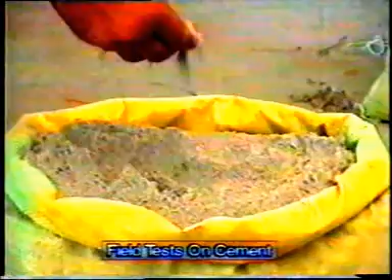Open the bag and take a good look at the cement. There should not be any visible lumps. The color of cement should normally be greenish grey. Thrust the hand into the cement bag. It must give you a cool feeling. Take a pinch of cement and feel between the fingers. It should give a smooth and not a gritty feeling. Take a handful of cement and throw it on a bucket full of water. The particles should float for some time before they sink.

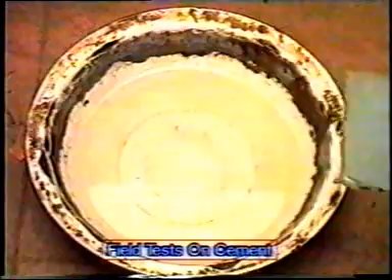Make a stiff paste of cement and make a cake with sharp edges. Put it on a glass plate and slowly take it under water. See that the shape of the cake is not disturbed while taking it down. After 24 hours, the cake should attain some strength without change in its shape.

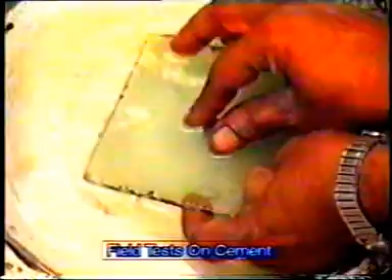Now let us see the fineness of cement test. Fineness of cement has an important bearing on the rate of hydration and hence on the rate of gain of strength. Finer particles offer greater surface area for hydration and hence the faster and the greater the development of strength. A good cement should have an average particle size of 10 microns and the maximum number of particles should have less

than 100 microns. The size fraction below 3 microns will have dominant effect on the one-day strength. The fraction between 3 to 25 microns will have effect on 28-day strength. This fineness test is conducted to know the fraction retained on the 90 micron sieve, whose presence is limited to 10% based on the strength criteria.

Disadvantages of more fineness of cement: Number 1, susceptibility to air setting. Number 2, early deterioration. Number 3, more drying shrinkage of concrete. Testing methods: by sieving and by air permeability.

Let us now see how this test will be conducted. Take 100 grams of cement into a 90 micron IS sieve. Break down air-set lumps, if present, with the fingers. Sieve the sample for about 15 minutes. Weigh the residue left in the 90 micron sieve.

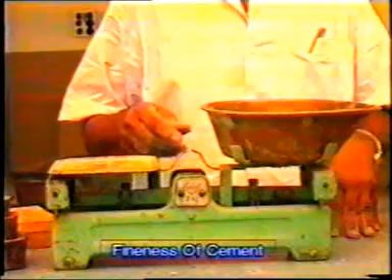Now the weight of the residue left in the 90 micron sieve is expressed as the percentage of the original weight of the cement taken. Recommendations of fineness of cement as per IS 269/1976: the residue left in the 90 micron sieve should be less than 10% for ordinary Portland cement. This should be less than 5% for rapid hardening cement.

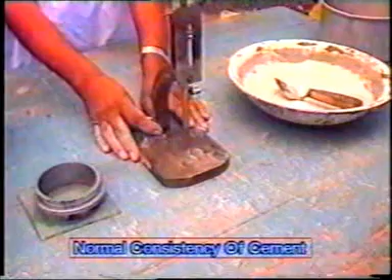The setup we are now looking at is for determination of normal consistency. Normal consistency of cement may be defined as that percentage of water which allows the plunger to penetrate to a depth of 5 to 7 mm from the bottom. This test is a prerequisite, as the quantity of water to be used for different tests is based on this normal consistency value only. Now let us see the apparatus required for this normal consistency.

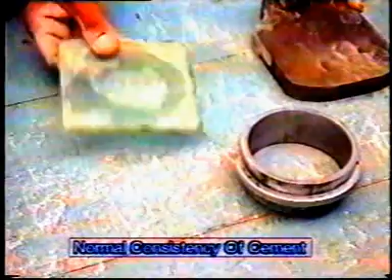Number 1, Vicat's apparatus, as per IS 5513/1968, whose penetration values are graduated from bottom to top, that is 0 to 50. Number 2, plunger of 10 mm dia and 50 mm long. Mold of 80 mm dia and 40 mm deep. Non-porous plate to place the mold and sample.

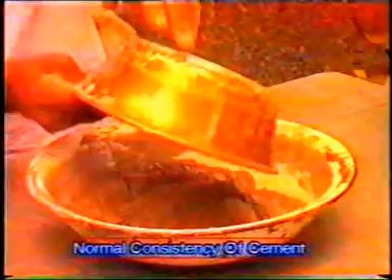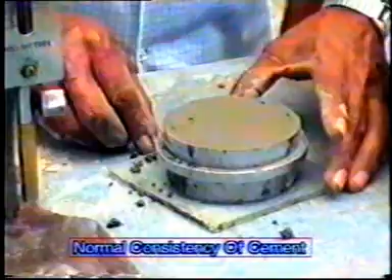Now let us see the procedure. Take 500 grams of cement. Now, as a first trial, prepare a paste by adding 25% of water by weight of cement. Fill the mold placed on a non-porous plate with the cement paste within 3 to 5 minutes from the time of addition of water to the cement. Shake the mold to expel the air.

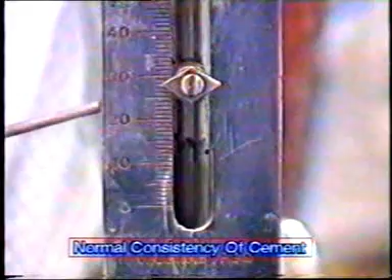Now place this Vicat's mold on the Vicat's apparatus. Now the plunger of Vicat's apparatus is brought down to touch the sample and allowed to fall quickly into the cement paste. Take the reading of depth of penetration. Now see the reading, which is more than the reading required for normal consistency, which indicates that the percentage of water added to the cement is less than required for the normal consistency.

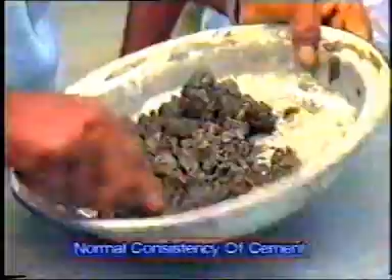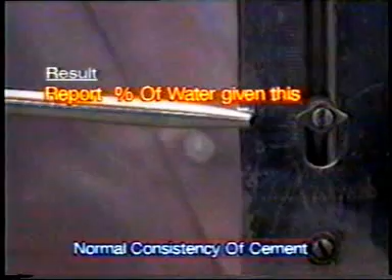Now as a second trial, let us add some more water to the cement and test it for normal consistency until the plunger of Vicat's apparatus penetrates to a depth which, measured from the bottom of the mold, reads 5 to 7 mm, as you can see in the reading now. Result: report the percentage of water required for the above process as the percentage of water required to produce the normal consistency, P.

Now, regarding initial setting time. Initial setting time may be defined as the time elapsed between the moment that the water is added to the cement to the time that the paste starts losing its plasticity. In actual practice, the starting point of losing plasticity, the end point of totally losing plasticity, and the time scale are very much important while dealing with cement paste or concrete.

Since certain time is required for mixing, transporting and placing, the concrete should remain totally in plastic condition during mixing and handling operations. Normally, a minimum period of 30 minutes is recommended for these operations to be carried out before concrete starts losing its plasticity. Initial setting time is to be found to know the time available for mixing and handling operations for a given cement, and also to schedule the above operations according to the availability of time.

Now, regarding final setting time. Final setting time may be defined as the time elapsed between the moment that the water is added to the cement to the time that the cement paste has completely lost its plasticity. No operations are to be done beyond this time. Let us go to the testing procedures now.

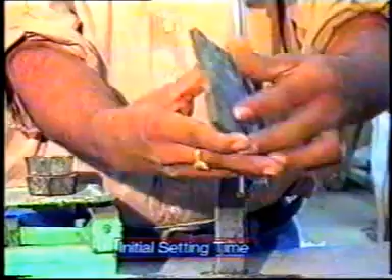Now let us see the apparatus required for the initial setting time. Number 1, Vicat's needle apparatus as per IS 5513-1969 with a needle of 1 mm square. Number 2, mold. Number 3, stopwatch. Number 4, non-porous plate. Number 5, a balance.

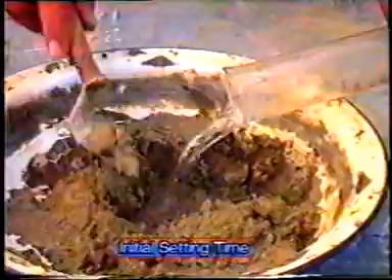Preparation of test block. Take 400 grams of cement into a porcelain dish. Add 0.85 times the quantity of water required for normal consistency. Mix the paste thoroughly and place the paste in the Vicat's mold, which is placed on a non-porous plate. Start the stopwatch at the instant when the water is added to the cement.

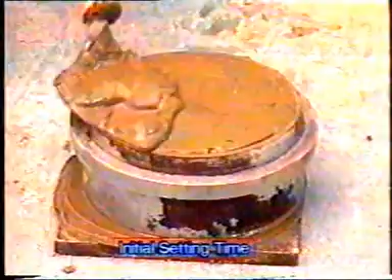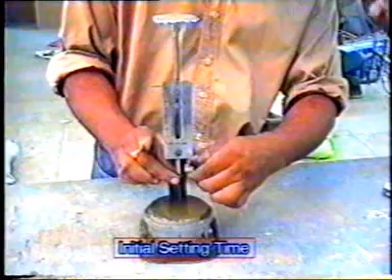Level off the surface and place the mold under the Vicat's apparatus needle. Lower the needle gently in contact with the surface of the test block. Quickly release the needle to penetrate into the test block.

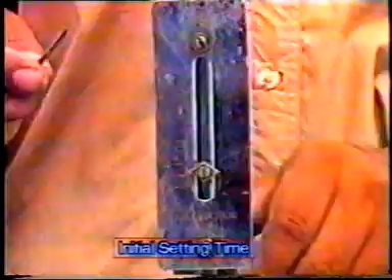As you can see, the needle has completely pierced the test block. That means that the initial setting time of cement has not yet come. Repeat the process of releasing the needle at regular intervals until the needle fails to pierce the block for 5 plus or minus 0.5 mm measured from bottom of the mold.

As you can see now in the reading, it is about 5.5 mm from the bottom of the mold, which indicates it has now reached the initial setting time period.

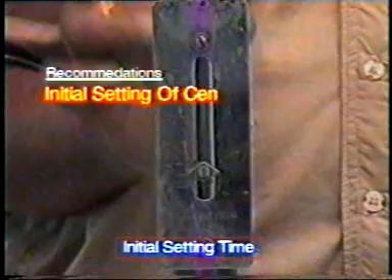Result. Report the time elapsed between the moment that the water is added to the cement to the time when the needle fails to pierce the test block, as seen above, as the initial setting time of cement. That is the time available for mixing and handling operations to be carried out in the field. Recommendations. The initial setting time of cement should not be less than 30 minutes for ordinary Portland cement.

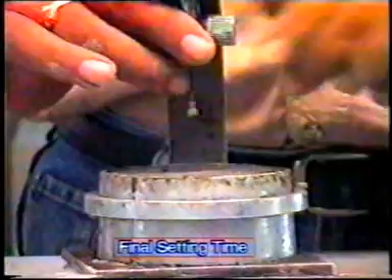Now for the final setting time, replace the needle of Vicat's apparatus with a needle with annular ring. The needle is gently applied on the surface of test block. Now you see not only the needle but also the outer ring has made an impression on the sample. This means that final setting time of cement has not yet reached.

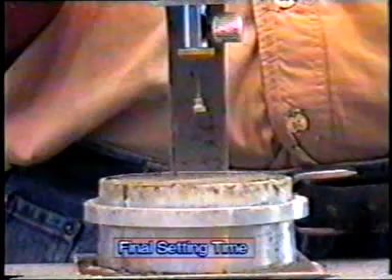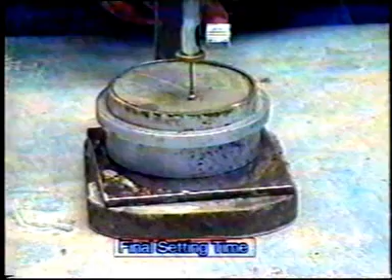This process of application of needle is repeated until the needle makes an impression on the test block but the outer ring fails to do so. Now as you can see, the inner needle of the Vicat's apparatus made an impression but the outer ring has failed. This indicates the time of final setting time of the cement.

Report this period elapsed between the time when the water is added to the cement and the time at which the needle makes impression and the outer ring fails to do so as a final setting time. Recommendations. The final setting time should not be more than 10 hours for ordinary Portland cement.

Now, soundness by Le Chatelier method. Certain cements have been found to undergo a large expansion after setting, which causes the disruption of the set and hardened mass. This will cause serious difficulty for the durability of the structures when such cements are used. This unsoundness is due to the presence of excess of lime than that could be combined with acidic oxide at the kiln. It is also due to insufficiency in fineness of grinding, too high proportion of magnesium content, etc.

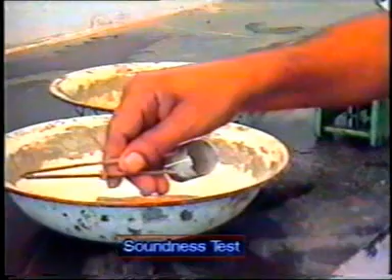Now, let us see the apparatus required for the soundness test of the cement. This method is by the Le Chatelier's apparatus. This apparatus consists of a small split cylinder of spring brass of 0.5 mm thick, 30 mm internal dia and 30 mm height. On either side of split mold, two indicators are attached with pointed ends. Length of these indicators is 165 mm.

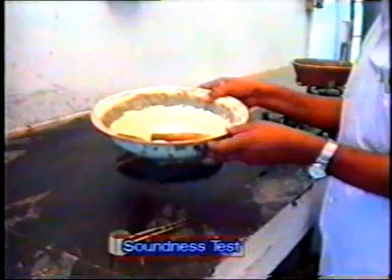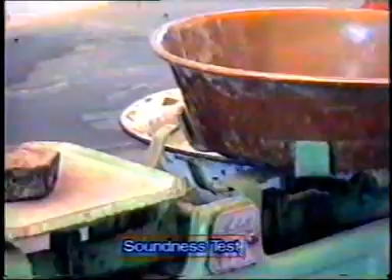Non-porous or glass plates to cover the apparatus on top and bottom. Mixing dish, small trowel, stove and dish for heating to boiling temperature. Now let us see the procedure. Take 200 grams of cement into the mixing dish. Add 0.78 times the water required for the normal consistency. Mix it thoroughly to get uniform paste.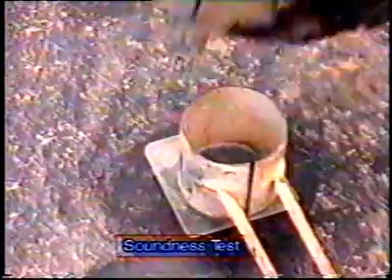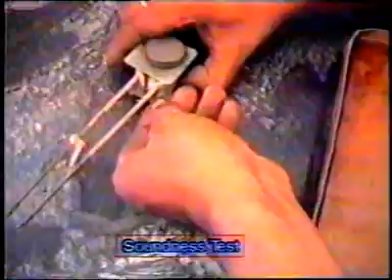Put it in the split cylinder which is placed on glass plate, taking care to keep the indicators together during this operation. Cover the cylinder with the glass plate and place a small weight on the glass plate. Put the entire setup in the water for 24 hours. Take out this cylinder and measure the distance between two indicators. Let it be L1.

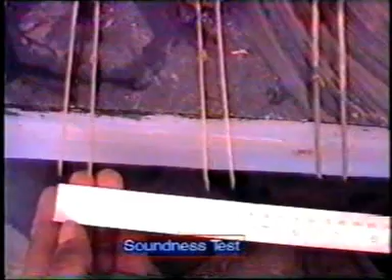Place the cylinder again in the water and raise the temperature to boiling temperature in about 35 minutes and allow it to boil for 3 hours. Take out the sample now and allow it to cool to the room temperature and measure the distance between the two indicators of the split cylinder at the pointed ends. Let this distance be L2.

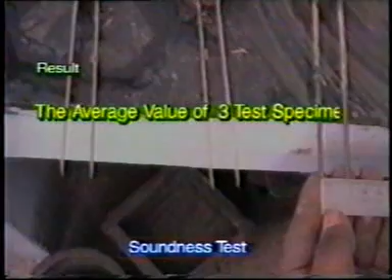The difference between the values L1 and L2 is called the soundness of cement. An average of 3 such samples will be reported as the soundness value of the cement. Recommendations. Soundness value of a given cement should not be more than 10 mm for a good ordinary Portland cement as per IS specifications.

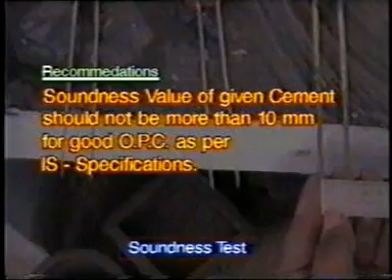Now, regarding strength of cement. The compressive strength of hardened cement is the most important of all the properties. Therefore, the cement is always tested for its strength in the laboratory before the cement is used in the important works. The strength of cement is found on the cement mortar of 1:3 ratio using sand conforming to IS 650-1960 supplied by the Tamil Nadu Mineral Development Corporation.

Now let us see the apparatus and material required for the strength test of cement. This is sand conforming to IS 650-1960. This sand is available in three different grades: grade 1, grade 2, grade 3. For our testing purpose, these three grades are to be mixed in equal proportions.

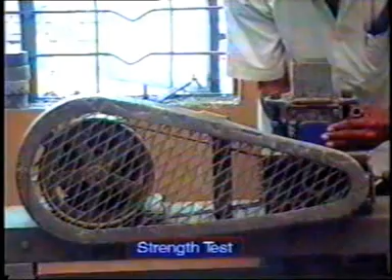Next, the vibrating machine, measuring jar, mixing dish, vise, balance, stopwatch, and mold of 7.06 centimeter size as per IS 4031-1968.

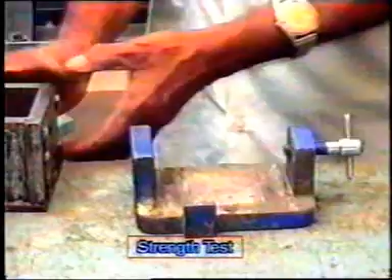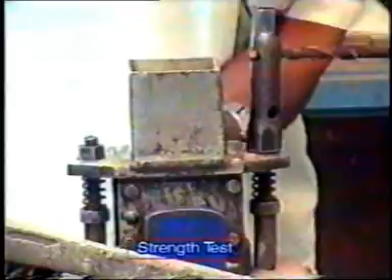Now let us see the procedure of this strength test. A thin film of petroleum jelly is applied to the contact surfaces of the bottom of the mold and its base to avoid water escaping during vibration. After applying the petroleum jelly, fix the mold in the vise and place the assembled mold on the table of the vibration machine along with the vise. Finally, hold it in position by means of suitable clamps on the vibration machine.

Now, place the sample of cement, 200 grams, into the mixing dish. Take 600 grams of sand, duly mixing sands of grade 1, grade 2, grade 3 in equal proportions. A total of 600 grams of sand is taken. That is the proportion of 1:3 by weight.

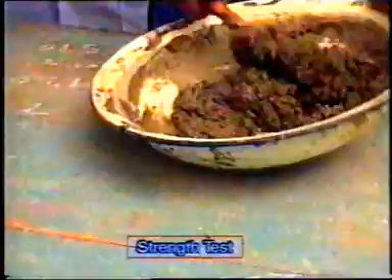Add water to the mix. Quantity of water to be added will be P/4 plus 3% of the combined weight of cement and sand, where P is the percentage of water required for normal consistency. Mix it thoroughly to get a uniform paste. This process of adding water and mixing to get the uniform paste should be completed within 4 minutes from the addition of water to the cement, and this should be conducted at 27 degrees centigrade temperature.

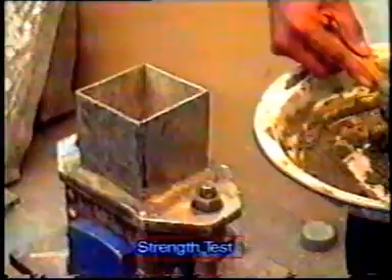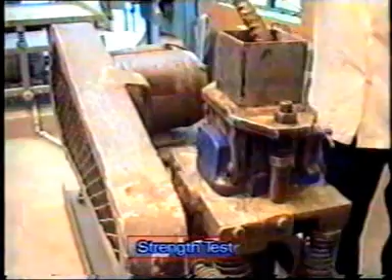Place the sample in the mold fixed on the vibration machine now. The mortar will be tamped with a rod 20 times. Mix is placed again in the mold and tamped again 20 times. Run the vibration machine for 3 minutes. Remove the mold with the base plate and smoothen the surface with a trowel.

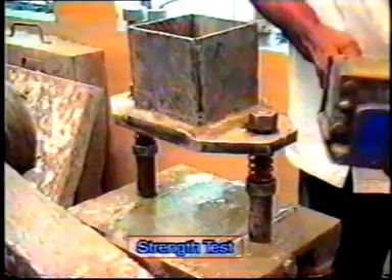Keep it at room temperature for 24 hours. Then remove it from the mold. Keep it in water curing for 27 days. Three such molds are prepared. One is for 3 days testing, the second is for 7 days testing, and the third one is for 28 days testing.

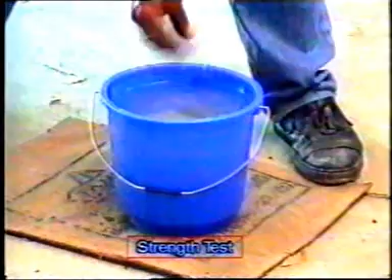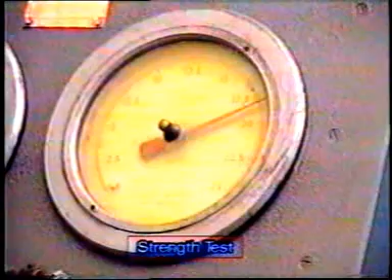Test the specimen in the compression testing machine by placing the cube in between the platens of the testing machine and apply the load at a uniform rate. Note down the load taken by the sample at its total failure. Load taken by the cube divided by the area of the face of the cube which is in contact with the platens of the compression testing machine will be the compressive strength of the cement.

Recommendations of the compressive strength values of ordinary Portland cement are as follows. For 33 grade cement on 3 days testing, the compressive strength should not be less than 160 kg per centimeter square. For 43 grade cement, it should not be less than 230 kg per centimeter square. For 53 grade cement, it should not be less than 270 kg per centimeter square.

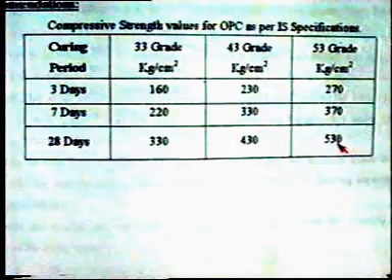On 7 days curing, for 33 grade cement, it should not be less than 220 kg per centimeter square. For 43 grade cement, it should not be less than 330 kg per centimeter square. For 53 grade cement, it should not be less than 370 kg per centimeter square. On 28 days curing, it should not be less than 330 kg per centimeter square for 33 grade cement, 430 kg per centimeter square for 43 grade cement, and it should not be less than 530 kg per centimeter square for 53 grade cement as per the IS specifications, as you see in the table now.

Aggregate. Aggregate is the prime engineering material both in concrete and pavement construction. As a material for concrete, it is an important constituent as it occupies 70 to 80% of the total volume of concrete. And hence, to know more about concrete, it is essential to know more about aggregate.

And as a material for pavement construction, aggregate occupies the major part of the pavement layers such as base courses like water-bound macadam, wearing courses like concrete and blacktop surface dressing layers, etc. Hence, the study of coarse aggregate for their suitability with respect to their strength, durability, shape, size, specific gravity and bulk density, etc. is a must before it is going to be used for specific purposes like material for concrete

or material for construction. Besides the strength aspect, the aggregates are classified as coarse aggregate and fine aggregate depending upon their size. The material ranging from 80 to 4.75 mm is called coarse aggregate and the aggregate material finer than 4.75 mm is called fine aggregate. The tests conducted on coarse aggregate and fine aggregate are different.

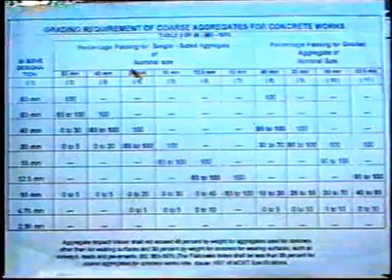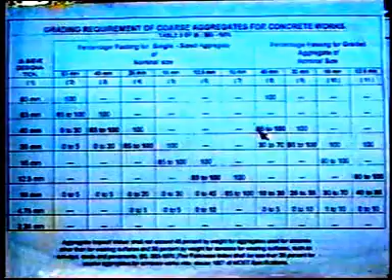Now let us see the grading requirements for the different usage of aggregates. Grading requirements of coarse aggregates for concrete works. Table 2 of IS 383/1970 specifies that the aggregate conforming to this table should only be used for concrete purposes. The left hand side portion of this table specifies the single sized aggregates to be used in the concrete.

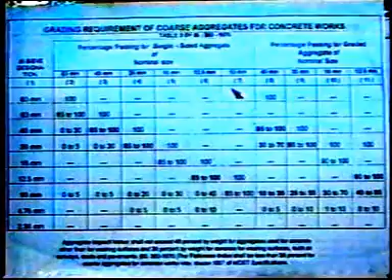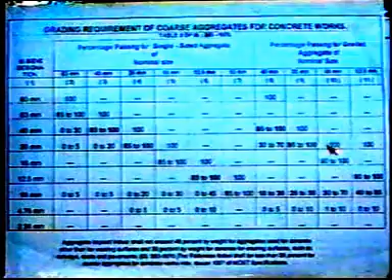The 63 mm, 40 mm, 20 mm, 16 mm, 12.5 mm and 10 mm single sized aggregates are covered in the left hand portion of the table. And the right hand portion of the table comprises the graded aggregate details, which comprises 40 mm graded aggregate, 20 mm graded aggregate, 16 mm graded aggregate, and 12.5 mm graded aggregate, which can be obtained by mixing the single sized aggregates shown on the left hand side in different proportions.

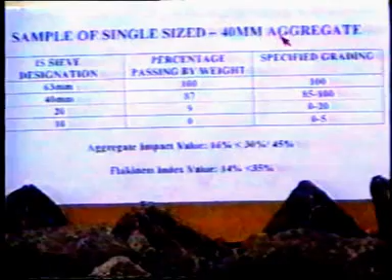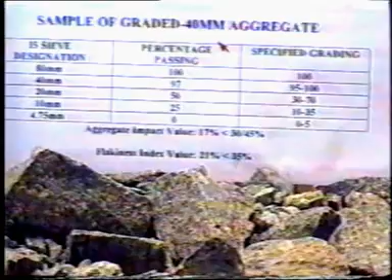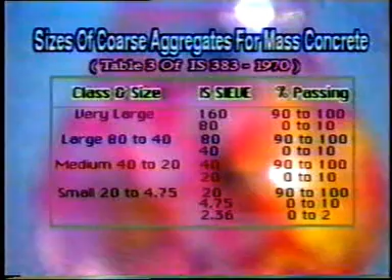Now let us see the sizes of coarse aggregate for mass concrete. This is as per table 3 of IS 383/1970. This table specifies the different sizes of aggregates to be used for the mass concreting purposes, varying the sizes from 160 mm to the 4.75 mm size. For huge mass concreting purposes, these sizes are to be used.

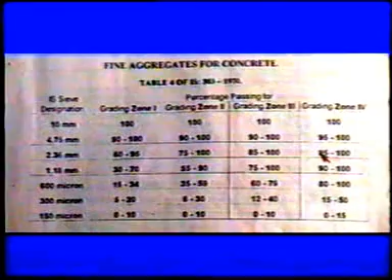Now let us have a look at the fine aggregates of Zone 1, Zone 2, Zone 3, Zone 4. This is sand of Zone 1 grading. This is a coarser one with a fineness modulus of nearly 3.5. This is Zone 2 graded fine aggregate. This is most ideal to use in the concreting purposes. Its fineness modulus ranges from 2.8 to 3.2.

This is Zone 3 grading of fine aggregate. This is still finer than the Zone 2 aggregate, whose fineness modulus ranges from 2.5 above. This is Zone 4 aggregate, still finer aggregate. Its usage is restricted for the RCC purposes.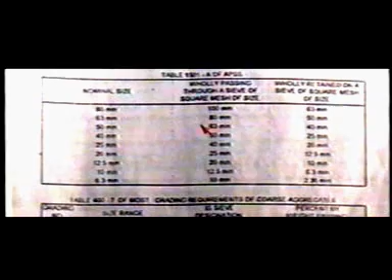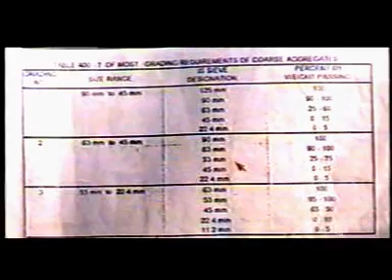This table shows the grading requirements of coarse aggregates for the roadworks. This is as per table 400-7 of MoRTH. There are 3 gradings given in the table. Grade 1 ranges from 90 mm to 45 mm size. Grade 2 ranges from 63 mm to 45 mm. And grade 3 ranges from 53 mm to 22.4 mm size aggregates. Different gradings can be obtained by mixing the different proportions and sizes of the aggregates from the tables shown before in the percentages shown in the 4th column of the table.

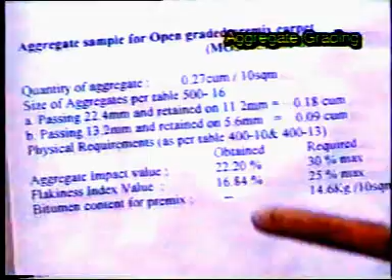Now let us see the aggregate grading requirement for the open graded premix carpet. This is as per MoRTH clause 509. Quantity of aggregate to be used is 0.27 cubic meter per 10 square meters. The other requirements are as shown in the table. The material looks like this.

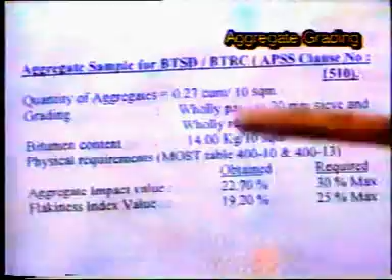Now let us see the grading requirements of aggregate sample for BTSD or BTRC as per APSS clause number 510. Quantity of aggregates used for this purpose is 0.27 cubic meter per 10 square meters, and other requirements are as per the table shown. The material meeting the requirements is as shown here.

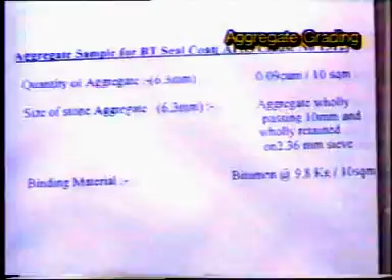Now let us see the aggregate grading requirement for the BT seal coat as per APSS clause number 1512. Binder material used for this purpose is 9.8 kg per 10 square meters. The aggregate material meeting the requirement looks like this.

Determination of bulk density of aggregate. Bulk density of aggregate is an important property to be known before it is going to be used in the pavement construction, since the qualitative and quantitative assessment, even after completion of the road pavement, is done with the help of the bulk density value of the aggregate only. Hence, it is recommended to conduct the test of bulk density before taking up the road and record it on the right side of the measurement book for future reference of quantity and quality assessment. Now let us see how this test is conducted.

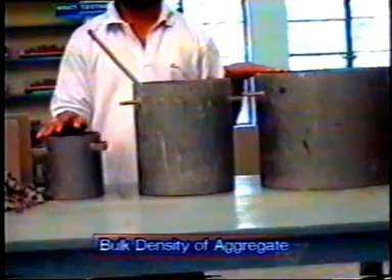Now let us see the apparatus required for the determination of bulk density of the aggregate. Cylindrical metal measures of 3 liter, 15 liter or 30 liter capacity, chosen depending upon the size of the aggregate to be tested. Tamping rod of 16 mm diameter and 60 cm long, rounded at one end. A balance accurate to 0.2% of the weight of sample to be weighed.

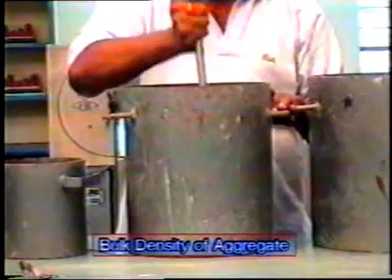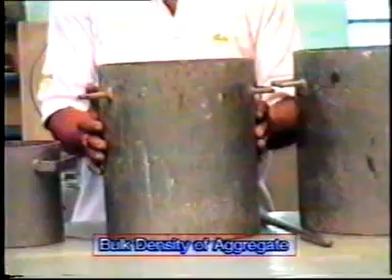Now the measure shall be filled with the material in about 3 different layers, each being tamped with tamping rod for 25 times. Here this tamping is for best possible naturalization of orientation of aggregate particles, not for compaction. After filling, level the surface of the filled measure neatly to flush with the sides of the measure.

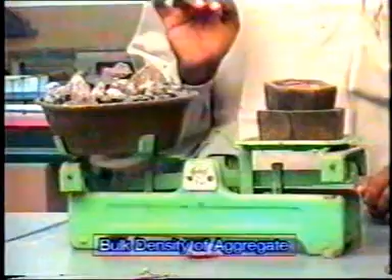Now weigh the sample of the aggregate filled in the measure and report the bulk density of aggregate as weight of sample of aggregates in the measure divided by its volume. Recommendations. The value of bulk density of aggregate thus found may be recorded on the right hand side of the M-book for future reference during the quality control inspections and inspection by the other higher officers.

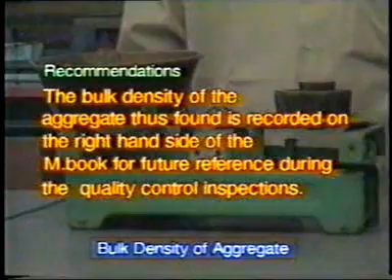Elongation index of aggregates. Elongation index may be defined as the percentage by weight of the aggregate whose greatest dimension or length is more than 1.8 times the mean dimension of the aggregate. Inferences. Too elongated material is not workable. They are likely to break under smaller loads than the aggregates which are spherical or cubical, hence not recommended for wearing coats. Now let us see how this test is conducted.

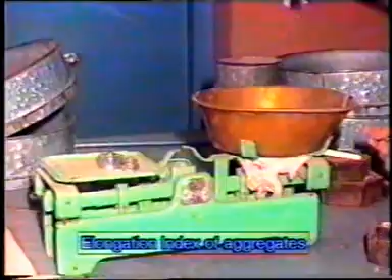Now first let us see the apparatus required for the elongation index of aggregate. First, length gauge. This is as per IS 2386 Part 1 1977. Balance. Thirdly, IS sieves of 63 mm, 50 mm, 40 mm, 31.5 mm, 25, 20, 16, 12.5, 10 and 6.3 mm sizes.

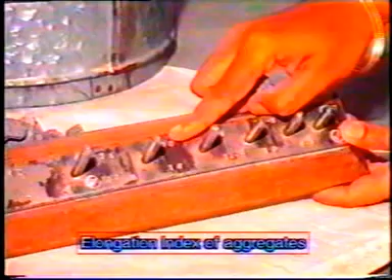Now let us see the procedure of determination of elongation index of the aggregates. A fraction of aggregate sample which passes through the 20 mm sieve and is retained on the 16 mm sieve is taken. 200 pieces of the aggregate are selected from the sample of the aggregate taken. The slot on the length gauge corresponding to this fraction of aggregate is selected. Now the material is tested piece by piece whether the entire fraction of aggregate passes through the slot or not.

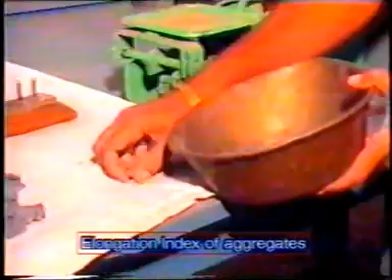The material is now collected in two heaps. One heap contains the material which passes lengthwise through the slot selected. Another heap contains the material which does not pass through the slot. Each part is weighed separately. This process is completed for other fractions of aggregate by choosing the corresponding slot from the length gauge.

The sum of weight of all fractions in which pieces do not pass through the corresponding slots and the total weight of all fractions is to be calculated. The elongation index may be reported as weight not passing lengthwise divided by total weight of the sample into 100.

Flakiness index of aggregate. Flakiness index may be defined as the percentage by weight of the aggregate whose least dimension or thickness is less than 0.6 times the mean dimension of the aggregate. Inferences. Too flaky material is not workable. They are likely to break under smaller loads than the aggregates which are spherical or cubical, hence not recommended for wearing coats.

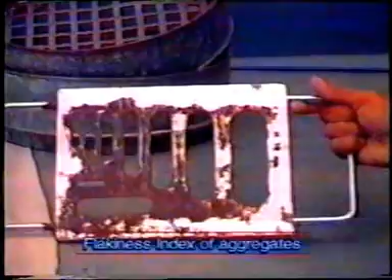Now let us see the apparatus required for the flakiness index of the aggregate. Number 1, thickness gauge. This is as per IS 2386 Part 1 of 1977. Balance and the IS sieves, same as that of the elongation index. Now let us see the procedure of determination of flakiness index of aggregates. A fraction of aggregate sample which passes through the 20 mm sieve and is retained on the 16 mm sieve is taken. 200 pieces of such aggregate are selected from the sample.